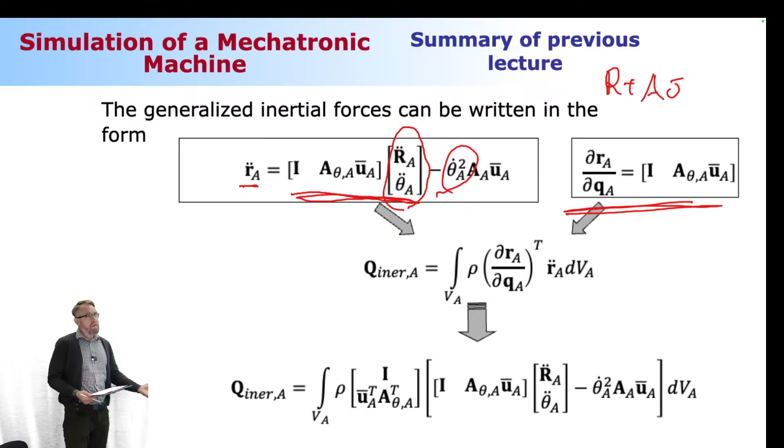Is this the only way to make it happen? No, like I said, there are many other ways, but this is fairly straightforward as it is based on global coordinates. This form, where we have these generalized coordinates like it is shown here, is called global coordinates, even though they are describing the body reference coordinate system with respect to the global coordinate system.

Alternatives that you might have seen in robotics are relative coordinates. That's a conceptually different story, because then we're looking at the body connected together via different kinds of joints. Like if there would hypothetically be another beam-like body connected via a revolute joint, you would look at the angle difference between these two bodies. This is what's called relative coordinates, typically used in robotics.

We are not going to discuss methods based on system topology, but are making use of this more straightforward global coordinates approach. But again, there are these other methods, and you can go back and forth between them. So if not happy with this selection of variables, you can make use of these relative coordinates. They are a generalized kind of mapping that you can convert one to the other, for your information level. I don't know if you guys care about this information, but now you know. At least you've been told.

So two components that come along: again, mass multiplied by acceleration, and the quadratic velocity vector. That's it.

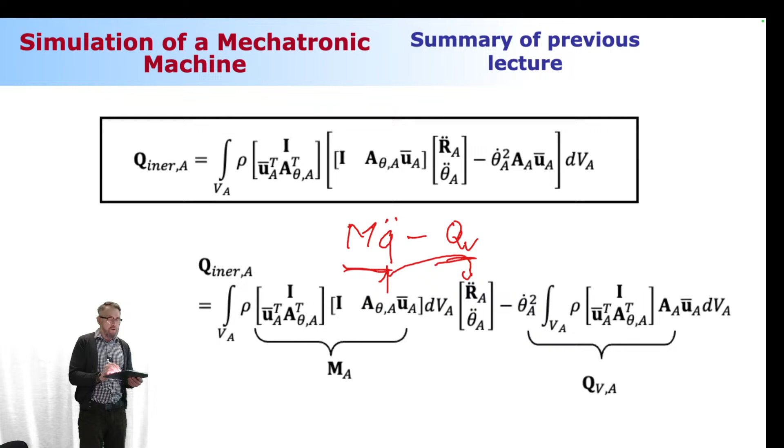Now, if you take a close look at these components, the mass matrix consists of three different parts. First, the submatrix located in the upper left corner is a diagonal matrix, where the diagonal components are the mass of the body. So this is a 2 by 2 diagonal matrix, off-diagonal components in the submatrix are zeros, and the diagonal components represent the mass of the body. This makes sense because the columns and rows associated with these components are translation in the x and y directions. Inertia has to be related to how heavy the mass is, so if you want translational acceleration, what matters is the mass of the body, nothing else.

Then the one located in the lower right corner is the mass moment of inertia, which is how much the inertia resists rotation. That depends on where you are rotating with respect to. If you're rotating with respect to a coordinate system in the middle of the bar, resistance is less than if the coordinate system is located at the end of the bar. Now keep this in mind: regardless of where you measure your inertia component, the mass matrix component for mass will always be the same. It's not possible that a human being will weigh differently depending on how you measure it. If you measure my body weight using my right leg or left leg, it's the same body weight, it doesn't change. Whereas the inertia will change because then we're looking at where the rotation is with respect to.

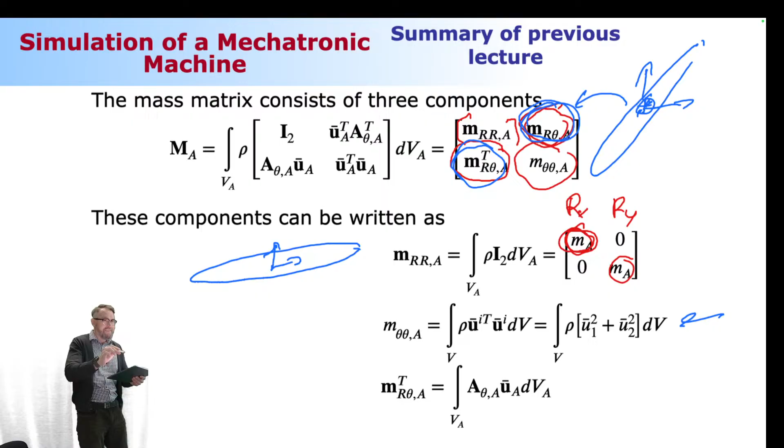Okay, when do you get the diagonal mass matrix? You get the diagonal mass matrix when the body reference coordinate system is located at the center of the mass. And your quadratic velocity vector becomes 0 for the same scenario - when the body reference coordinate system is located at the center of the mass.

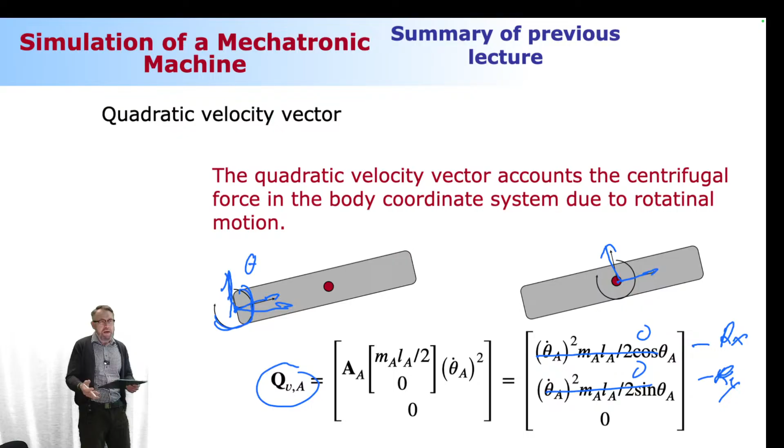Now we're in the first in-class quiz. The first in-class quiz is on. The mass matrix of a body is a diagonal matrix if: the body reference coordinate system is located at the center of the mass; the body reference coordinate system is located outside the center of mass but within the boundaries of the body; the body has a beam-like shape; or the body reference coordinate system is located outside the body. These are the 4 scenarios, and only one is correct.

Should we look at this one, or the next in-class quiz, since the next one is related? The quadratic velocity vector is 0 if - same scenarios but in a different order this time: the body has a beam-like shape; the body reference coordinate system is located at the center of mass; the body reference coordinate system is located outside the center of mass but within the boundaries of the body; or the body reference coordinate system is located outside the body. These are the same 4 options as the previous quiz, just in a different order.

So let me put myself back here. This is what I asked in the beginning. Now, I accept nothing but a 100% success rate. Okay, are we good? Let me see if there's any... All right.

So we're going to take all the bodies in our system into account, because in a multi-body system, as the title implies, it consists of multiple bodies. So what we need to do for each of these bodies is take the virtual work done by each body into account. This is a concept that is different than, for example, in a finite element procedure, because we're going to keep on adding the coordinates. We're going to be adding the work done by each of the bodies simply by keep on adding the number of unknowns, which is conceptually different from many other computational procedures.

So this is what you're going to get. You're going to have here generalized inertia forces minus generalized external applied forces. That's the kind of like this way. Remember what we discussed in the very beginning.

The same story, but the difference is this. This is expressed using global coordinates. This is the same, but using generalized coordinates. And what we're really after here is, of course, this one.

We still have a problem here, because in this equation we are not taking constraints, these motion limitations, into account. So that needs to be accounted for one way or another, and of course we have multiple ways to take that into account.

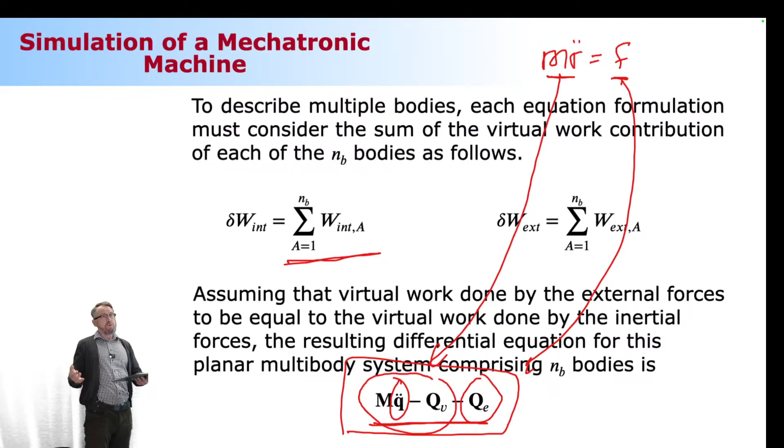But anyways, let me first explain how you can construct the system mass matrix, the system quadratic velocity vector, and the system vector of external applied forces. Like I said, you do that by keep on adding the coordinates.

So this system mass matrix is called a block diagonal mass matrix, but it's not sharing degrees of freedom. Why is this? Simply because if we have a vector of generalized coordinates, it consists of unknowns related to the first body, unknowns related to the second body, and so on and so forth. So we keep on adding the length of the unknowns based on the number of bodies in a system.

Okay guys, how many bodies, how many coordinates does each of the bodies need? Three. So, team 400 Euros car, you guys need to look at me too. So you need 3 coordinates, and it's going to be 3 generalized coordinates per each body, okay? If you have 2 bodies, how many coordinates do you need? 6, and so on and so forth.

The same holds here. So now if you have, let's say, a total of 3 bodies, what's going to be the size of your mass matrix? 3 by 3, it's going to be 9 by 9. Because we keep on adding, this submatrix is going to be 3 by 3, this submatrix is going to be 3 by 3, this is going to be 3 by 3. And if we have a total of 3 bodies, then the final dimension is going to be 9 by 9.

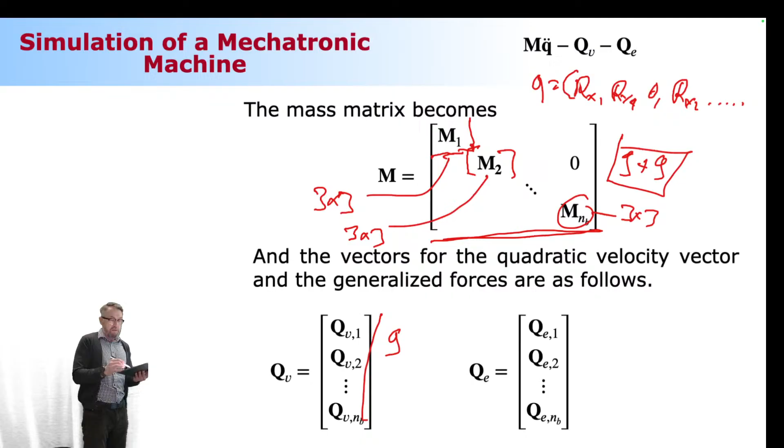Okay? The same, if we have here 3 bodies, what's going to be the length of the quadratic velocity vector? 9 units. And if it is external applied forces, it's going to be 9 units.

And then we have the vector of constraints, which is kind of separated. So we have the equation of motion, and then we have constraints. Something needs to be done. We are not happy the way things are because they are not accounted for yet. They are separately accounted, but we need to put them in the same package where the equation of motion and constraints are simultaneously accounted for. All right? And that's what we're going to look at.

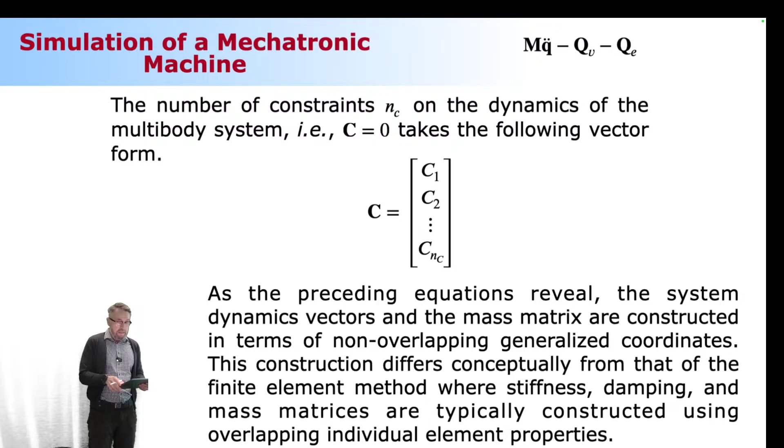Now here's the whole story when you're using this very sophisticated way of virtual work. So you have virtual work of the entire system: inertial forces, external applied forces. This is eventually how things will be written.

Now here comes something you have not heard before, because the concept of virtual work is very often misused, and it's misused exactly in the way that it is explained here. So you're saying that this equation is going to be equal to 0 regardless of what? Regardless of the scenario. And this equation can be set equal to 0 in a certain scenario only.

In a certain scenario where the virtual displacement, this one here, has to be kinematically admissible. A kinematically admissible virtual displacement would be something like, if you have a box connected to ground via a translational joint, a kinematically admissible displacement would be moving it back and forth in a way that doesn't violate the constraint.

But that's not the same as this one, because this one is saying virtual displacement of all the generalized coordinates. If I do it as mentioned here, I would also introduce a virtual displacement like this. That's not kinematically possible because the constraints are not allowing me to do so. Or I can introduce the rotation of the box like this. Same story, that's not kinematically admissible.

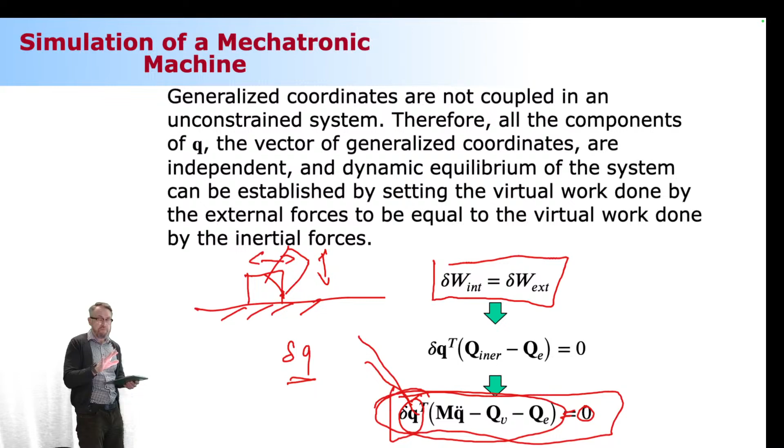So if I continue the story, this equation, generally speaking, is not equal to 0. Why not? Because the virtual displacement is introduced to all the generalized coordinates, and we are not accounting for the constraints. So this is a big problem.

So we have to express this in a way that it is kinematically possible, which is a little involving. So this is a task we can make it happen, but we are not going to do this today. So we can use something a little different than that, and that's kind of what we're aiming here.

Let me try to summarize this because you guys need to listen to me right now. So this is what came out from the concept of virtual work. And generally speaking, we cannot set this to be equal to 0 because we introduced the virtual displacement to all the possible motion scenarios, which is typically not possible.

So if I have here a crankshaft mechanism, let's say I'm going to take a look at the connection rod like here. The connection rod can move in a certain way because of the constraints. I cannot just say that it moves any way it wants, regardless of the constraints, because I would violate the constraints. Now this is what I'm going to take a look at next. So I'm going to express this in a way that takes constraints into account.

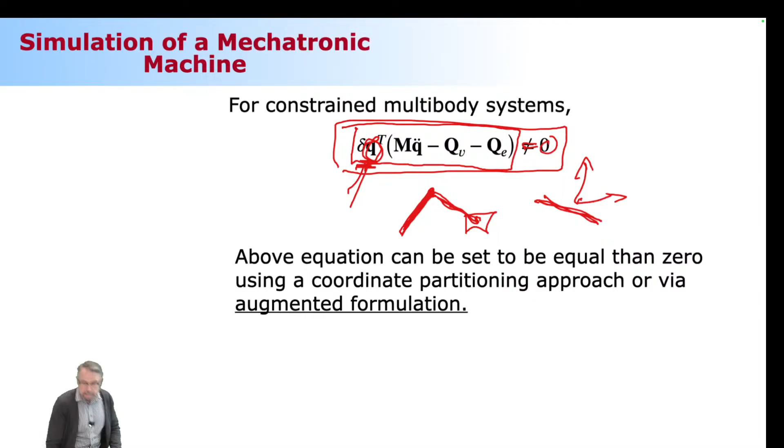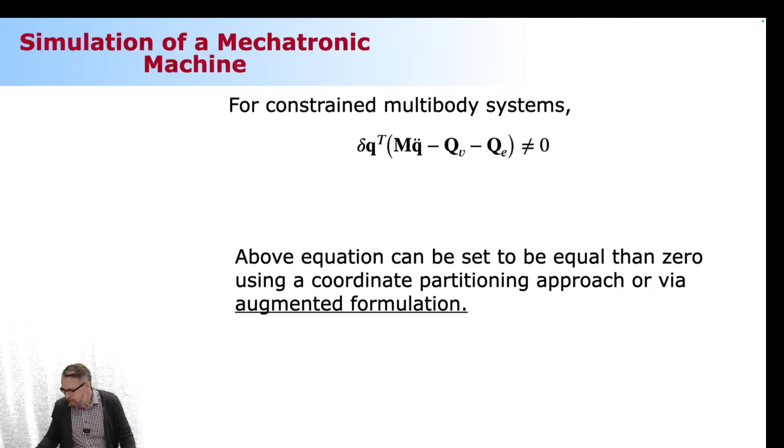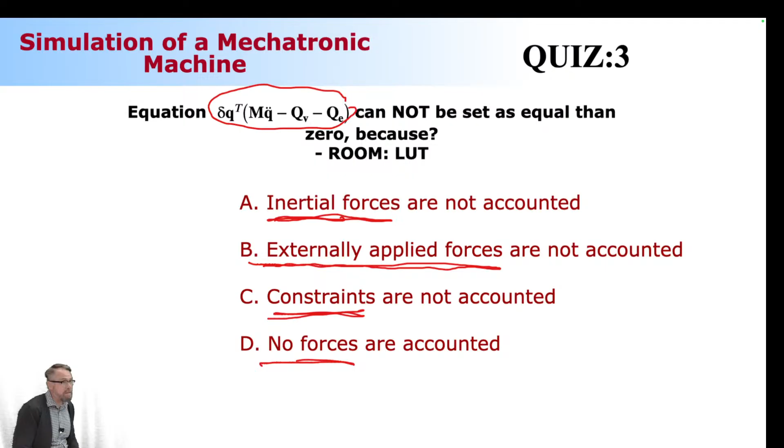Okay, so let me take myself back here. My next question is this: the equation we just looked at cannot be set equal to 0 because something is missing, something we have not accounted for. Now take a look at this equation and see if we are taking inertial forces into account. Are we taking inertial forces into account in this equation? Are we going to take the external applied forces into account? Are those accounted for? And are we going to take constraints into account? And are we going to take no forces into account? No forces are accounted for. So these are the four options.

Okay, the question is not on. So let me put it on. This one, okay.

And then what follows is that we're going to make a break from mechanics. Good news, so we are not going to look at mechanics for the next slides, but instead we're going to take a look at the subject matter that we like the most: mathematics. How do you guys feel about that? Yeah, I can tell for online participants that people are smiling a lot. They're very happy here in the lecture room. Some of them are crying because of the happiness, that finally they can leave mechanics behind and focus on mathematics only.

Okay, but this one, what is correct? What's the correct answer? D. C. Yes, constant. Constraints. Seriously, guys?

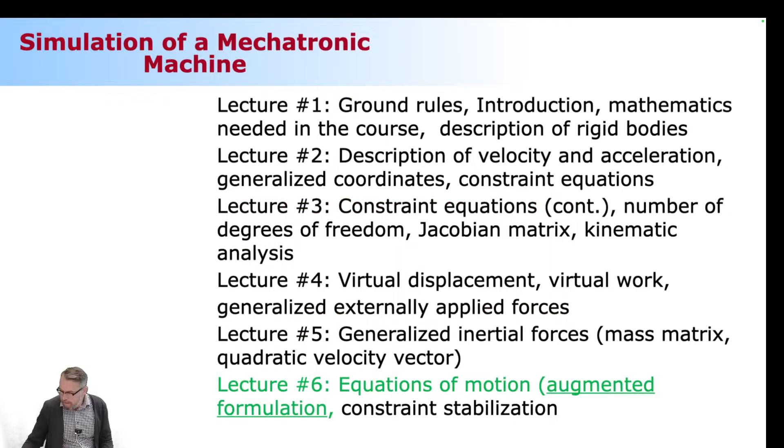Okay, all right. So we got last time it was like 91 answers? So we can wait another minute, and then we're gonna go. And then let me just show you what follows is mathematics.

So I want you to revisit your mathematical notes. You remember when you were in elementary school, they mentioned that there's this optimization problem where you need to minimize the function such that the constraints are accounted for. This is exactly what we're doing here, same story. And if you take a look at your notes from elementary school, you'll soon remember there were two options: you can substitute the constraint inside of the original function and then differentiate the original function, and this is one way to find the minimum. Or you can add these constraints to the original function with help of Lagrange multipliers.

All remember this story? Or was it so many years back that you don't remember this so well anymore?

Okay, so we're going to take a look at that momentarily, but before that, we got all the answers in. I don't think it's 100%, maybe 80, I'm thinking it's as low as 70. Okay, so it's 80, just switch down to 84. It was 85, somebody was just entering the incorrect answer.

But constraints are not accounted for, so we have to take constraints into account. The problem is that we introduce in the virtual displacement all the coordinates, not considering constraints at all.

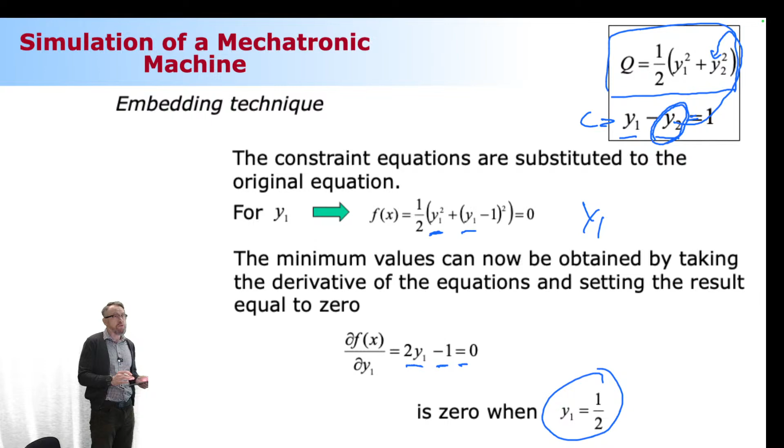Then you redo the whole story, but this time solving for the second component, which is y2. Here you take this to the other side of the equation and substitute the result here. This is how it reads. And then you differentiate it.

Now the only variable you deal with is y2, and you differentiate that with respect to y2. This is what you're going to get: 1 plus 2 multiplied by y2 equal to 0. The extreme again can be found when you set this equal to 0, like shown here, and solve for y2, which is minus 1 divided by 2.

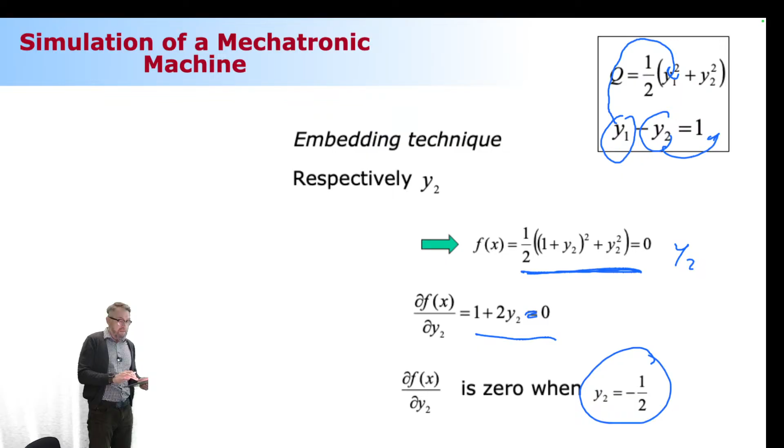Nothing new here, this is what you learned already in your childhood. Nothing special, but you might have forgotten there's this alternative: instead of substituting the constraint inside your original function, you make use of the Lagrange multipliers.

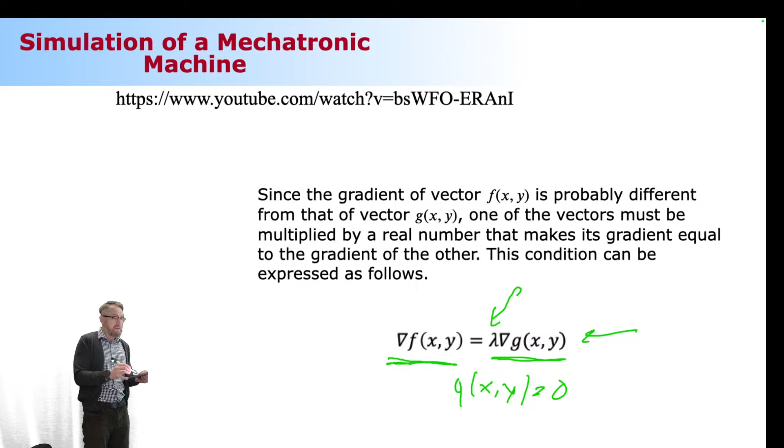The math is this: this is a delta of the original function, this is a delta of the constraint equations, and then this is the one that makes them equal in length. This is where the minimum is located at. And then we have to take one more thing into account, which is that we have to include this constraint because we have to stay within the trail. This is what we need to minimize next. This is where these two gradients are parallel, and this is where you stay within the trail, mathematically expressed.

Okay, now the same problem we looked at a little while ago: this is my original function, this is my constraint equation. How can I make use of the same story, but in this mathematical scenario? We have to compute a delta of the original function, which I'm simply taking my original function here and differentiating that with respect to my variables. And what are the variables this time? This q vector consists of two components, that is y1 and y2. Okay, of course this is a scalar.

This is again scalar, this is a vector. So when you do this differentiation, you're going to get the vector, not the matrix, because this is scalar instead of vector. You're going to get these two components.

Simply differentiate this with respect to y1, you're going to get y1. Differentiate this with respect to y2, you're going to get y2.

Then I'm going to take my constraint equation and do the same. I'm going to compute this gradient of the constraint equations with respect to my variables. You're going to get 1 and minus 1.

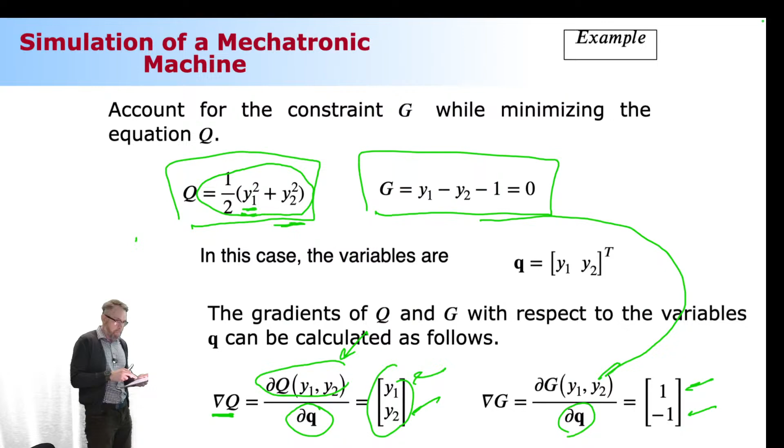What is that in the mechanics? Well, if you have the pendulum like this, because of the revolute shown here, this price we have to pay because of the constraints are reaction forces due to the constraints.

Reaction forces due to the constraints. Okay. Very lengthy story, very painful story.

And now you guys are thinking, okay, it's going to be very difficult when we make use of this thing. That's the opposite, it's an opposite. It makes things easier because adding a constraint is something like...

Let me tell a story. Like the multi-body community, there have always been two strong communities: one that is American community and one that is a European community. And they have a disagreement about what is the best way to go. There's no such thing like the best way to go, but the American community always goes according to these Lagrange multipliers because it keeps things simple, but it's just adding the number of unknowns. Things are very simple, whereas the European community is always favored for substitution.

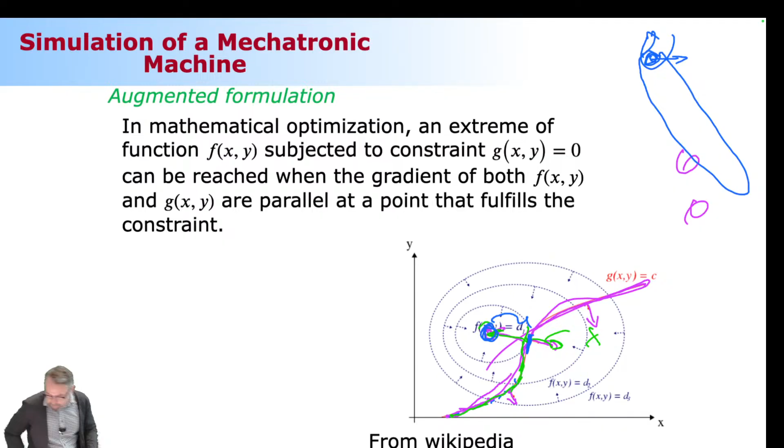Okay, so my proposal is this: we're going to make use of what we just learned in the case of multi-body system dynamics. So this was the whole concept of Lagrange multipliers. That's what we're going to do.

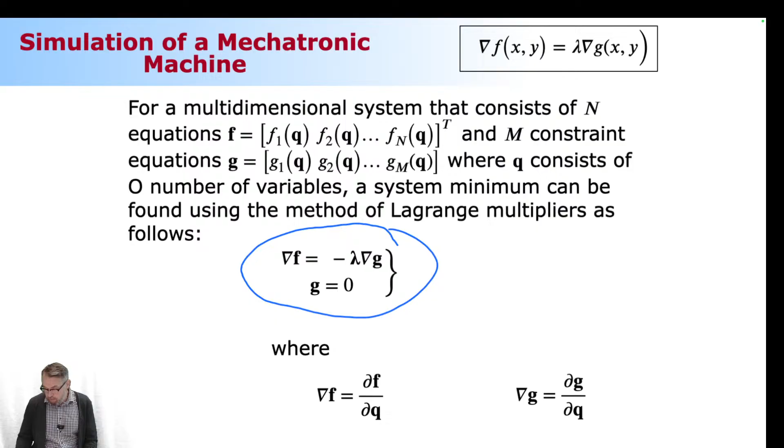And when you take a look at these components, what are they? They're actually something that we are already familiar with. So we have here, this is the original function, which is inertia forces minus external applied forces. We knew this already. And what is this?

This one here, when you differentiate your constraints with respect to your variables, is something that we are already familiar with. This is the Jacobian matrix. Because the Jacobian matrix, remember, was this. This is the constraint equation. This is the unknowns.

When you add them together, now this is how it reads, and that's it. Now we kind of have an equation of motion because we have constraints taken into account with help of Lagrange multipliers. So we add the constraints to the original equation, and that's how we're going to find the extreme location.

Okay, now you guys, if you still find your way away from the lecture room, how many minutes do you need? How many hours do you need to recover from this? One hour, one hour. Yeah, today I don't know if you noticed that I mentioned we have this question and answer session getting started at 6 o'clock. But today I need to leave early from my office, so I need to leave at 6:45. So it's only going to be 45 minutes today, because I have family business to take care of.

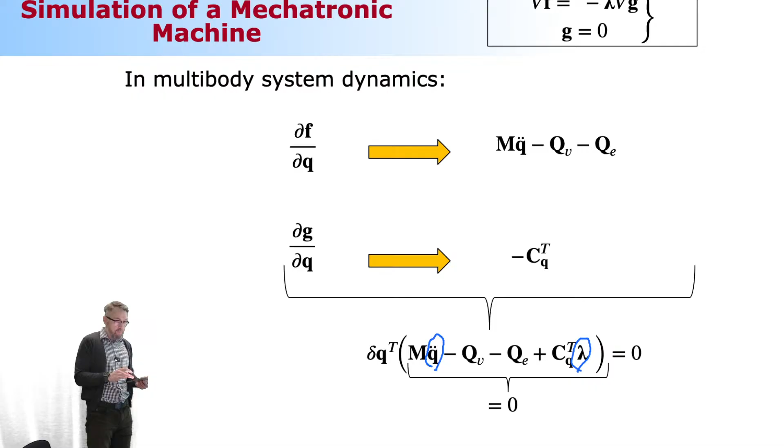So we need to make use of what we just discussed earlier, the constraint equations. Now we have a matching number of equations and unknowns. Here we have unknowns, which are the acceleration of generalized coordinates and Lagrange multipliers. Once we take constraints into account, then they match. Why do they match? Because the number of Lagrange multipliers is always going to be the same as the number of constraint equations. The number of reaction forces will always be the same as the number of constraint equations.

This is it. So this is going to be something that is called a set of differential algebraic equations. The problem is that if you look at the time integration schemes that are available out there, most of them are not made for this kind of system. There are some that are good for differential algebraic equations, or systems of differential algebraic equations, but most time integration schemes are used to deal with ordinary differential equations. And this is not that form.

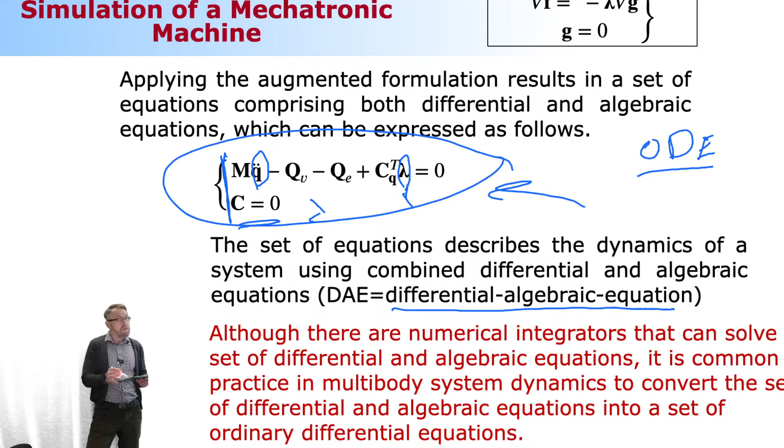So what we can do then is convert this equation to be in a form of ordinary differential equations. That's going to happen by making use of the constraint equations. We're going to differentiate them twice with respect to time. We're going to be able to introduce a new vector, which is called QC. It has no physical interpretation, no clear physical meaning, but it helps us convert differential algebraic equations to ordinary differential equations. Now, if I introduce this very last component, I'm able to convert this equation to be expressed like this.

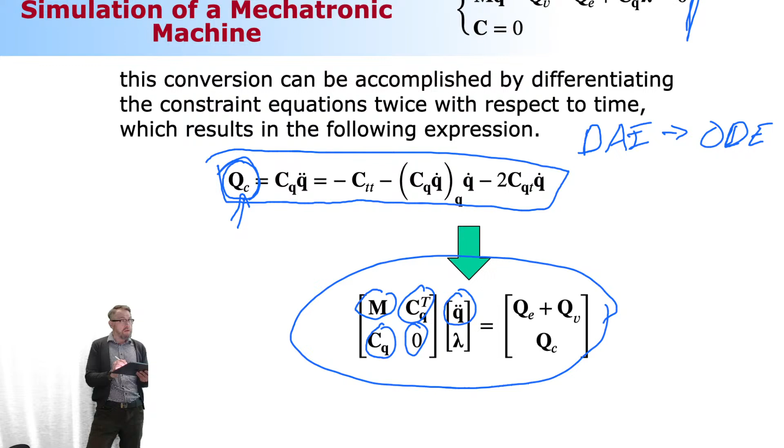And this is the equation of motion. Remember, this is a mass matrix, this is a Jacobian matrix, Jacobian matrix transposed, this is a zero matrix, this is acceleration of generalized coordinates, this is Lagrange multipliers, external applied forces, quadratic velocity vector, and the QC to make this conversion.

What is going to be the vector of unknowns? It is this one. The vector of unknowns is no longer just the generalized coordinates, but generalized coordinates plus constraint equations expressed by Lagrange multipliers. Okay, so now if I have a system like this—sorry, that's a little bit of an unclear drawing—but it's a pendulum, one moving body. How many generalized coordinates?

3, because every body needs 3. How many constraints? 2. So it's going to be 3, 2. What's going to be the number of unknowns? 5. Because this is unknown, like expressed here, and this is unknown, like expressed here. Not the constraint, let me correct myself. Constraint is not unknown, but how much it's going to introduce the reaction forces, that is unknown. That is expressed by Lagrange multipliers, this guy. So the number of unknowns is total of 5.

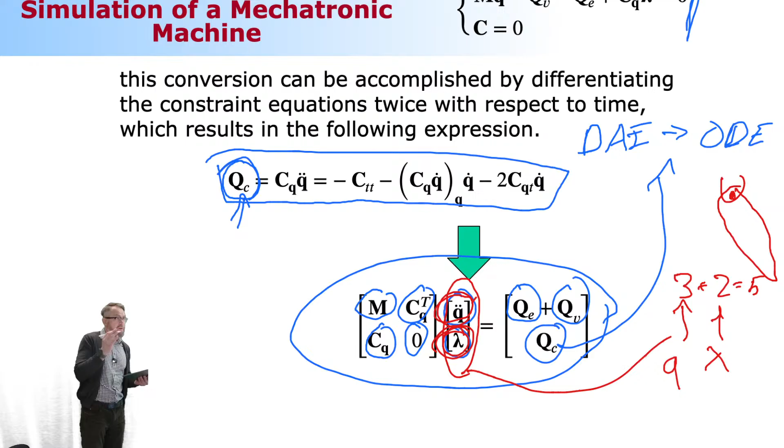Good. Now this is a whole story in short. This is where we're introducing the Lagrange multipliers. We're going to take the constraints into account. Once we differentiate the constraint twice with respect to time, we're able to do the conversion from differential algebraic equations to ordinary differential equations. That's the end of the story. So we reached the final conclusion of the class. Only thing left is we need to train this a couple times, and that's it. Then you're fully educated in what comes in computational dynamics. Not fully educated, but let's say you know at least one method, you know all the components, you know the concept behind it.

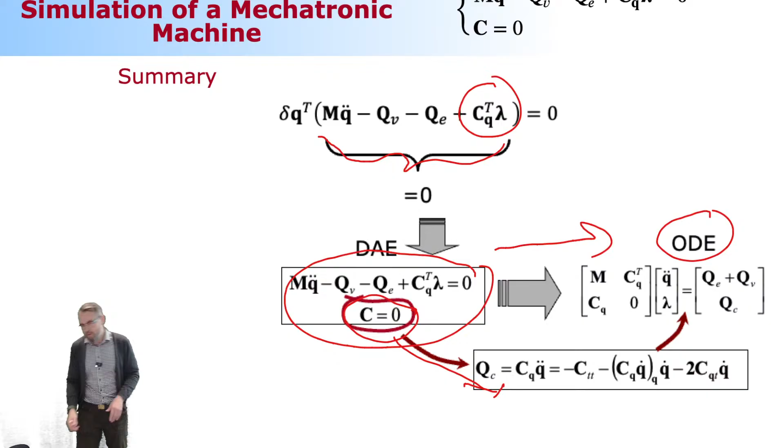Let me tell you this. What's the course that is the most hated course in the history of the universities? Dynamics. People hate it big time because it's so complicated, no one figures out how dynamics works. So once we're done with this story, you guys are not just experts of dynamics, but computational dynamics also. So it's okay to walk like a couple days like Michael Jackson did, moonwalking style, celebrating this big accomplishment, because it's a big deal. And then you need to start working like others. But this is a big deal. Big deal. Okay.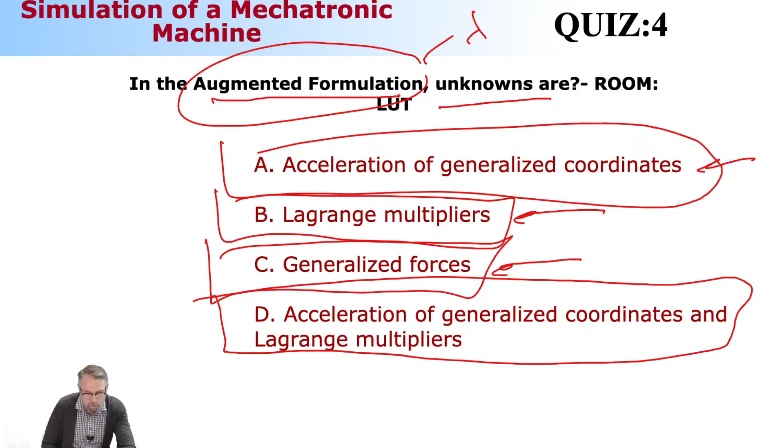In augmented formulation, unknowns are: acceleration of generalized coordinates, and augmented formulation is the one based on Lagrange multipliers. Acceleration of generalized coordinates and Lagrange multipliers, generalized forces, or acceleration of generalized coordinates and Lagrange multipliers. Which one is the correct answer? These are the 4 choices. Let me take this to the in-class quiz, and then we're going to take a couple more in-class quizzes and simply practice what we just learned. Okay, in augmented formulation, that's a method based on Lagrange multipliers. What are the unknowns?

Pretty easy, I would say. Okay, so would you like to see this more, or can I go? Because what I would like to do next is this: I would like to practice what we just learned. And I'm going to solve, first what I'm going to solve is the dynamic response of this complicated mechanism. So it's almost like a pendulum, but it's more complicated than that.

So it's a system that consists of one moving body that is constrained in a primitive joint here. So this can go up and down, and this can go left and right. So this is going to be my mechanism. This is applied by gravity, so the gravity force only. Nothing but the gravity.

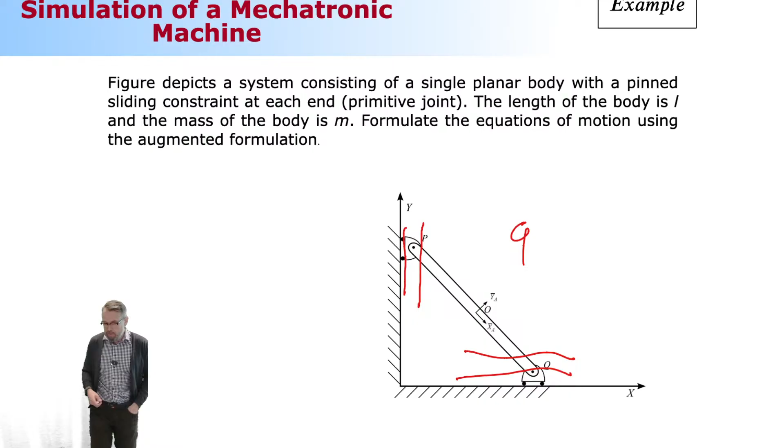So how this works - what we're going to do is follow certain steps, and more or less automatically, once we've completed those steps, we have an equation of motion. Now here comes something extremely important to understand: no thinking, just following the steps, and it's going to be fine. It's going to be automatically correct. And as soon as you start thinking about shortcuts and clever ways to go, you're going to make a mistake. So what we learn: no thinking, very systematically go from one step to another, and then you end up with an equation of motion.

Okay, first step. First step is, in this example, the number of unknowns is what? Okay, let me first take this off. I'm going to take a look at the in-class quiz.

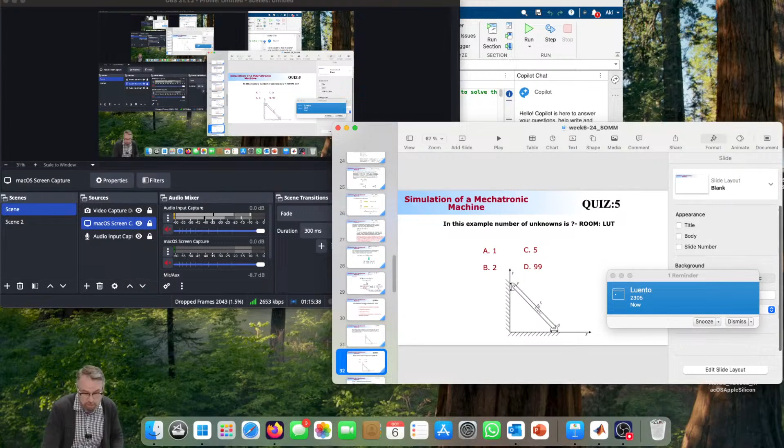This is 100, that's absolutely right, so this is a 100% success rate. But you guys are still thinking, so while thinking, let me show how to solve the response.

Okay, these are the steps. Number 1, mass matrix. Highly recommended that you do not think too much, just take the pre-calculated tables and that's it.

First, I need to take a look at the 2 by 2 matrix that is located in the upper left corner. So it's going to be a diagonal matrix where the mass of the body is located in the diagonal components.

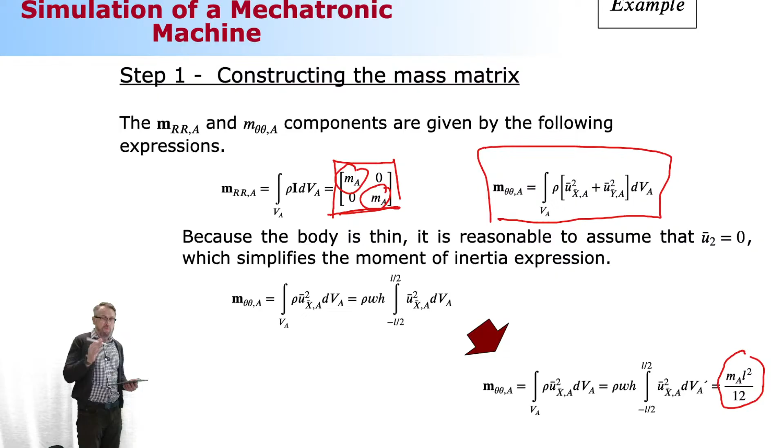Then I need to compute the mass moment of inertia. I don't recommend you compute it in this hard way, but just take a pre-calculated table and that's it. When you do so, you're going to get the mass multiplied by length squared divided by 12, because this is the lowest mass moment of inertia you can get for a body like that, since the body reference coordinate system is located at the center of mass.​

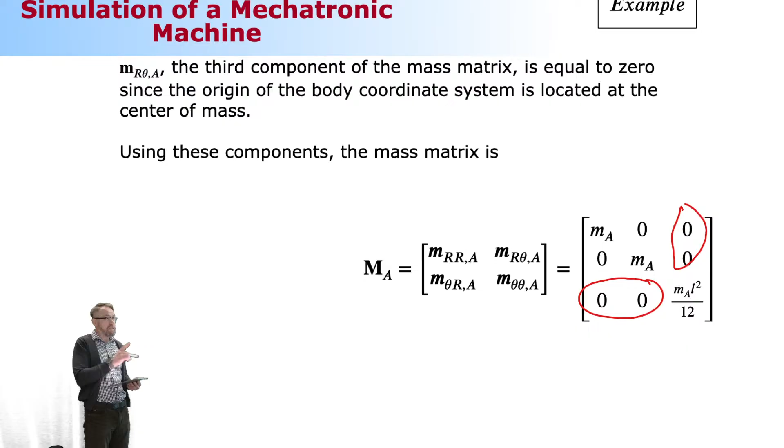Okay, then the off-diagonal component is going to be 0 because the body reference coordinate system is located at the center of mass. This is my mass matrix.

Step: construct the Jacobian. What are the components in the Jacobian? I need to get the constraints, and I need to differentiate my constraints with respect to my generalized coordinates, which are here.

Okay, constraints are located here and here. So what should I do for that? I simply go to each of these locations with the help of the equation, the only one that I know, this one.

So first I'm going to go here, then orient myself according to the body reference coordinate system, and then make my last leg with the help of vector u bar.

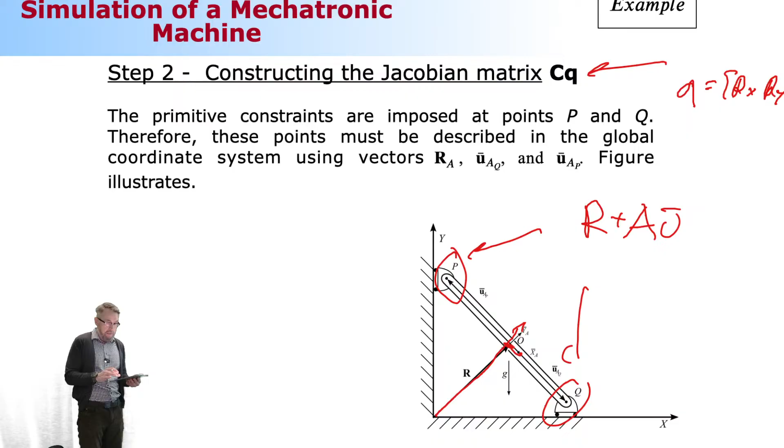So let's take a look at point P, the one that is here. I'm going to first travel to the origin of the body reference coordinate system, taking orientation into account, and the last thing is the vector u bar.

Look at how the body reference coordinate system is pointed. This is x, pointing downwards. This is y, pointing in the transverse direction. So how much I have to travel to reach this location is going to be x minus L divided by 2.

y is 0. When I substitute that information here, setting this, the motion in the global x direction is constrained — this is not possible, meaning this one here has to be 0. So when I do this math, it gives me this constraint equation.

Make sense? Second one, located — maybe I need to take some of the drawings away. Okay, so the next point is this one. Same story: I'm going to first travel to the origin of the body reference coordinate system.

Then I take the body orientation into account, and then make my last leg with the help of the vector u bar. Vector u bar obviously is L divided by 2, because x is pointing downwards, and then the y transverse direction is 0.

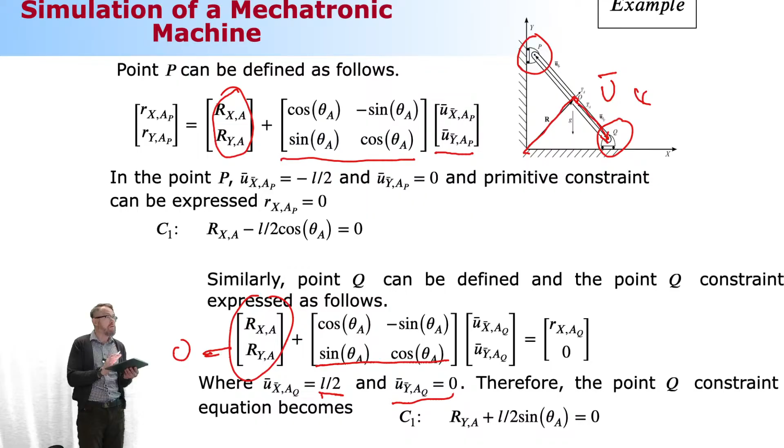That's going to keep, and again, now the motion in the y direction is going to be 0, so that gives me my second constraint equation. That needs to be differentiated with respect to my variables, and here's my Jacobian. Done.

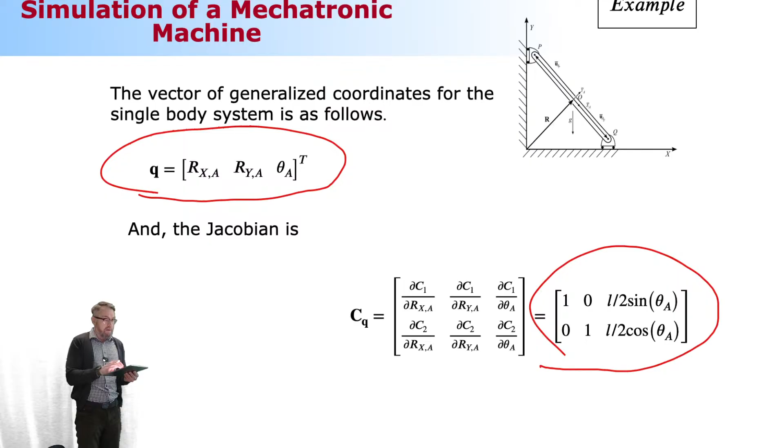Step number 3: generalized external applied forces. I say only one force is applying to the system, the gravity force, pointing downwards. So that's the only force in the system.

So what I need to do is identify where the force is applying. It's here — vector u bar here is 0. When I differentiate that location with respect to my variables, it gives me the magic mapping matrix, which is not very magical this time.

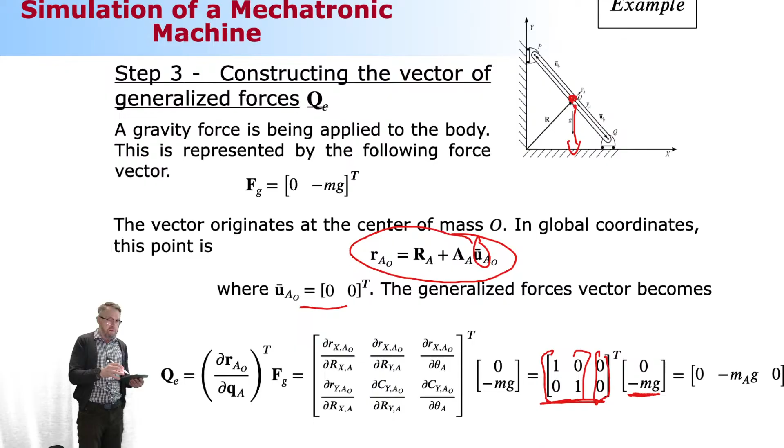It's the identity matrix, and then the 0 matrix, 0 vector. Let me correct myself. And then that's multiplied by the gravity force, which has a component in the y direction only, and it's going to be mass multiplied by the gravity constant with a minus sign, because it's pointing downwards. This is my generalized external applied forces.

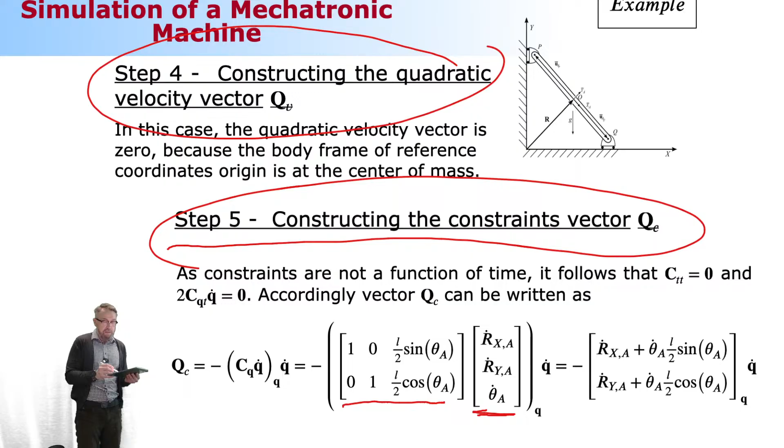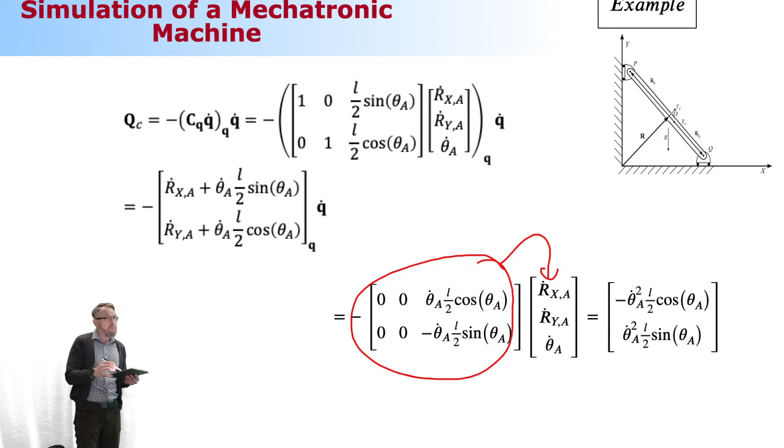Quadratic velocity vector is 0, so I don't need to care about that. The one thing left is this vector QC, where I have to differentiate my constraints this complicated way we learn when we compute the kinematics. So here's the Jacobian multiplied by velocity, which gives me the vector differentiated with respect to my generalized coordinates. This is what I'm going to get as a result. Then that is finally multiplied with velocities, giving me the vector of two components.

Last thing to do is assembling. So this is my already inverted, semi-inverted mass matrix. Jacobian with the transpose, this is my external applied forces, and this is my QC vector. I'm good to go. I can solve here my velocity first, and then position, and that's it.

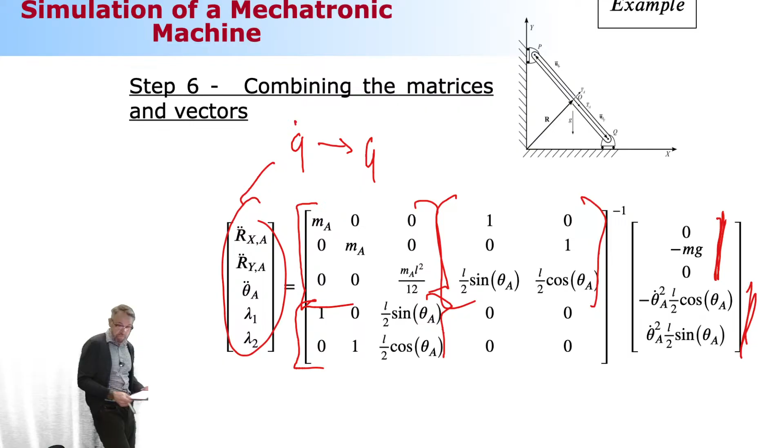Would you like to see it? Okay. Ready.

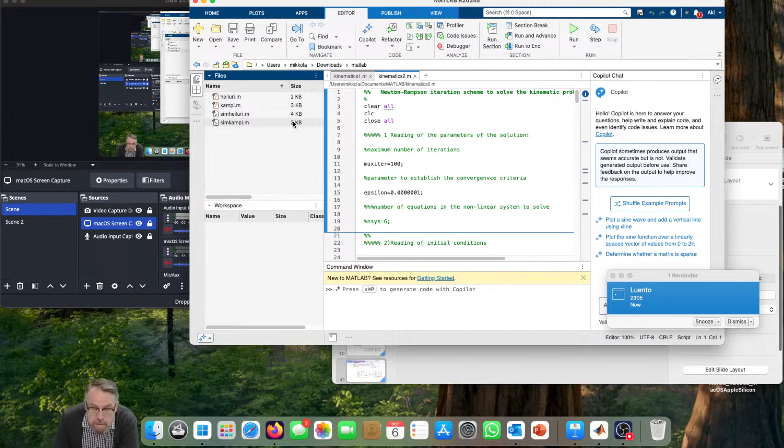So let's see if we can visualize. This is a visualization. Let me make this small enough so it's not blocking the view. We're like here. Okay, ready?

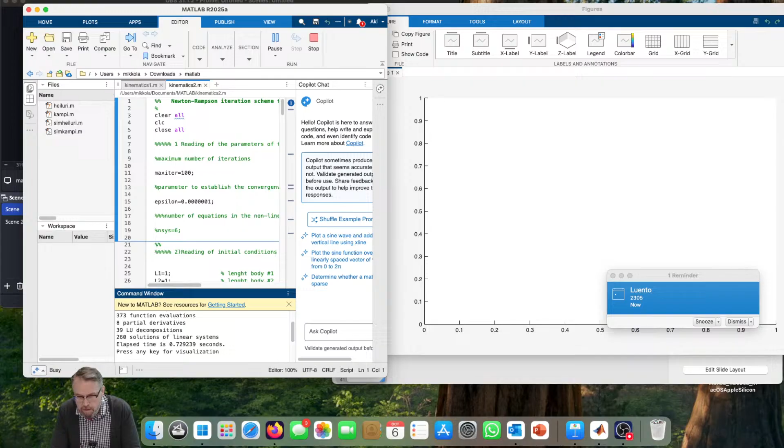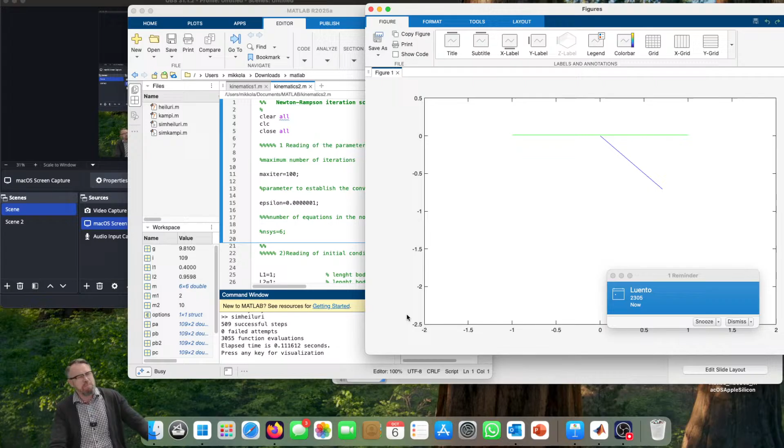This was incorrect, so I don't want to use this one. So let me see. Okay. Not good, because this is not what we wanted to solve. I'm experiencing technical difficulties - actually, I'm not experiencing technical difficulties, but I did not make a preparation good enough, because this is now the pendulum.

I don't want to solve that, but I want to solve the system that is slightly different than we just looked at. We can correct the file, or we can just take a look at another example, and I can solve the correct response next week.

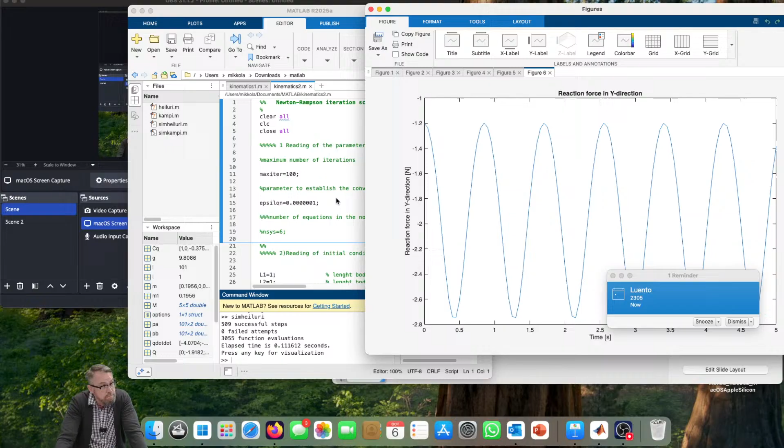Which one do you want to go? Next week, because you are rushing yourself back home, I guess. Okay, good thing, so you're going to see the MATLAB solver a week from now.

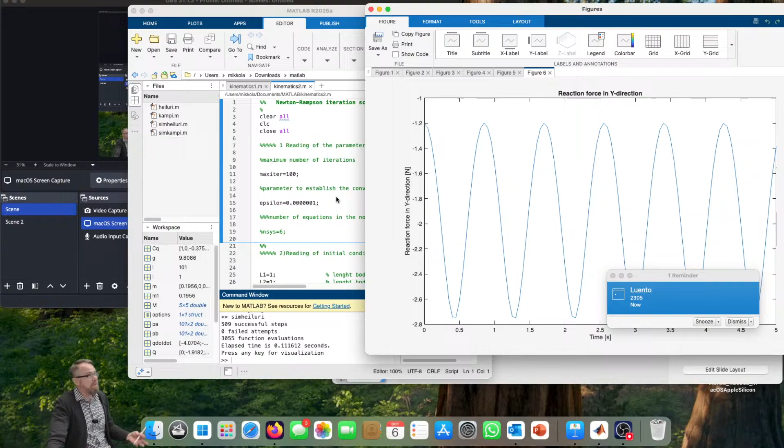And this is going to be something that is so straightforward that any mechanism in your life from this on, you can solve it, if it is a planar case. Three-dimensional case is a little bit more complicated than that, but just a little bit more complicated. Okay, that's it.

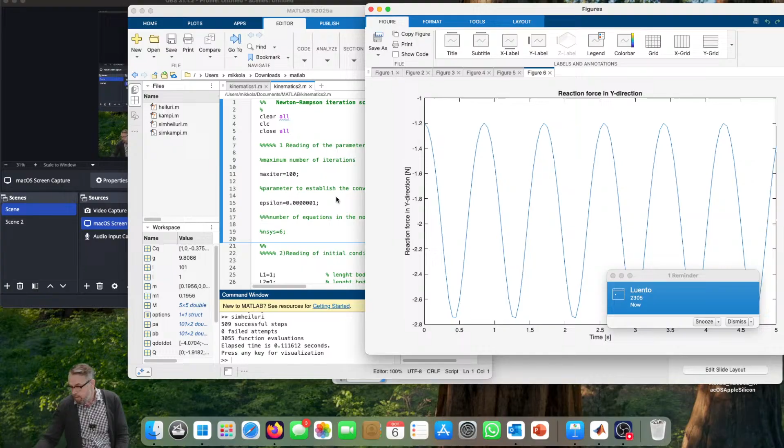My next mechanism is this. It consists of two moving bodies, one revolute joint here, another revolute joint here, and one prismatic joint here. How many generalized coordinates?

6. How many constraints? How many constraints? 6.

Guys happy? 5, you're saying 5? Okay, 5 is an alternative. Any other options? 3.

Okay, so it's a little bit unclear writing. Okay, Team Asia is changing that from 6 to 5. Okay, you sure about that? Team Finland is saying 5. Correct answer is 5. How many unknowns?

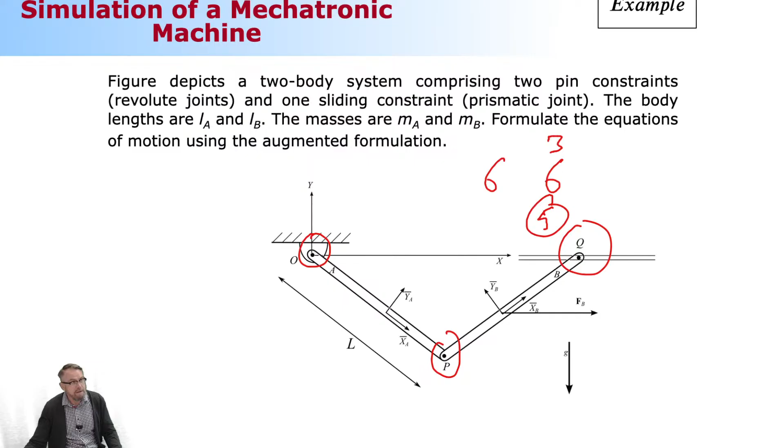11. Okay. All right, so let me take myself here. Okay, what was the success rate here?

I think it was pretty high, so because the correct answer was 5.

Okay, 1 has a 1 degree of freedom, or wasn't what I was asking. 2 was a planar case - makes no sense. 99 got 1 vote. I think we have somebody that is logging in the system and intentionally answering everything incorrectly.

But keep this in your mind. You can play as much as you want, but it is affecting your final grading. So I don't know if you're going to laugh so much if you know that, because it's not so much fun.

Okay, this one. Okay, you want to see the mechanism again? No, it's okay. This is how it looks.

Now I have two forces. I have one point force applying here, and the gravity that is applying to both of the bodies.

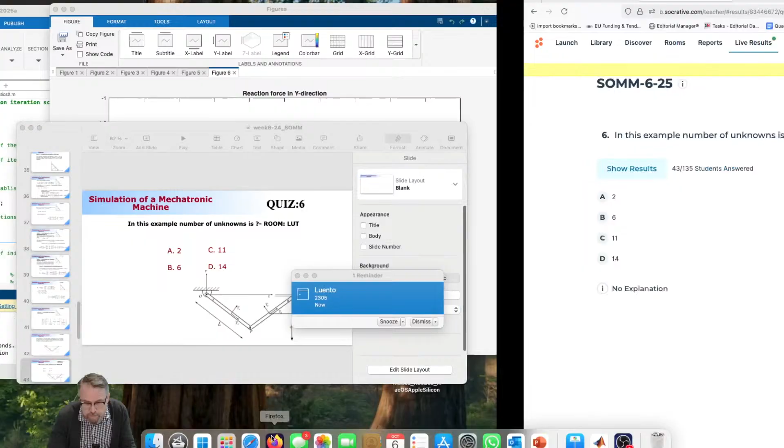Okay, so the number of unknowns in this case is how much? Okay, let me take a look at this one. Oh, you guys are not yet ready?

Okay, while you guys are thinking, let me show how you can create the equation of motion. What's the difference between this example and the previous one? No difference, you're going to follow the same steps over and over again. What you get automatically is your equation of motion. Again, we start from the mass matrix, that's number 1, Jacobian matrix, number 2, so on and so forth. No exceptions, always the same procedure over and over again.

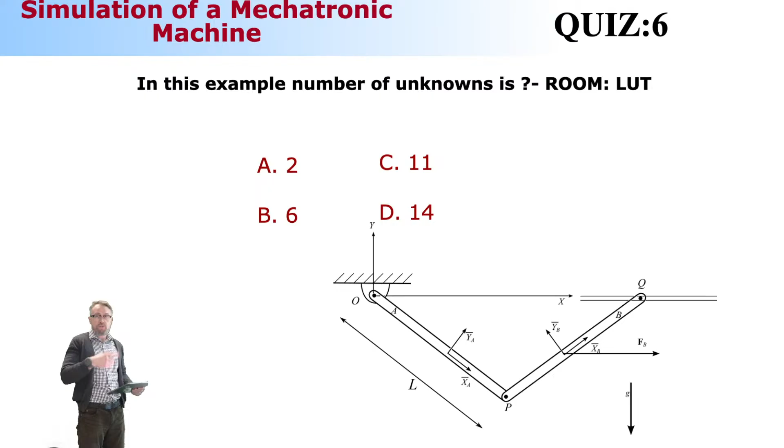Okay, first the mass matrix. This time I'm cutting corners a little bit, so I'm just telling you how the mass matrix looks. This one is a beam-like body, and the body reference coordinate system is located at the center of mass. Same here, beam-like body, it's here. So it's going to be diagonal matrices that I get, diagonal matrices for this one and this one.

And now I went too far off. Here, this is how they look. And I just need to assemble them as a block diagonal assembly. So here's the first body, here's the second body. They do not overlap.

Those of you in finite element formulation know that if you have two neighboring elements, they share the same degrees of freedom, and that's where the stiffness matrices overlap. So the system stiffness matrix would be one stiffness matrix here, another one here, and they overlap at this particular location. We don't do that in multi-body system dynamics. We don't do the overlapping.

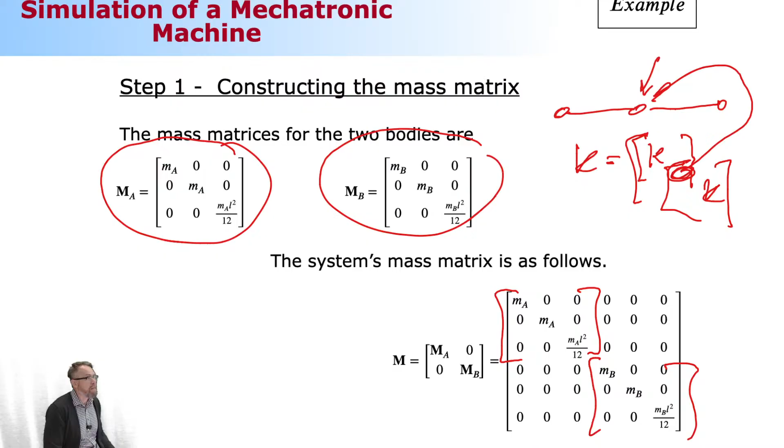A question: why is it divided by 12 at the corner? Because of the shape, it's the center of inertia. The question again: why is it divided by 12? Because this is a mass moment of inertia. Remember when we compute the mass moment of inertia for a beam-like body, this was mass times length squared divided by 12.

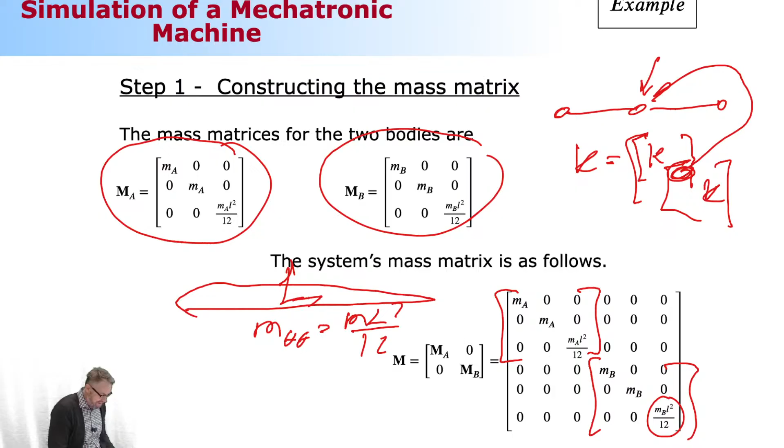Constraints, Jacobian matrix. What we do is compare the constraints. This time I'm cutting corners, so I'll simply set the constraint for this one here. I'm going to set these to be equal to zero because it's a revolute joint, and the revolute joint is located at the origin of the global coordinate system. Then I'll take a look at this revolute joint located here. Let me change the color. I'm going to travel here like this, and set these two notations equal. That gives me two additional constraints.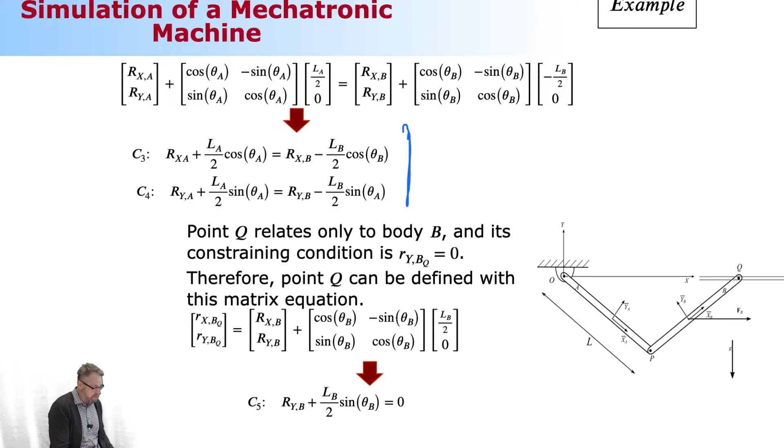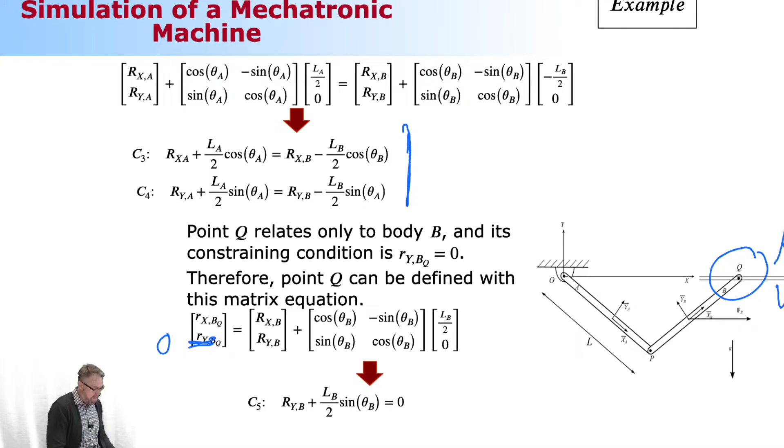Constraints 3 and 4. Then there's a primitive joint where the motion in the global y direction is constrained, meaning this one here is constrained. This is my fifth constraint equation. Now the Jacobian looks like this. These are my constraint equations, which I'm differentiating with respect to my variables, Rx1 corresponding to the first body, and the same for the second body. This is how the Jacobian reads.

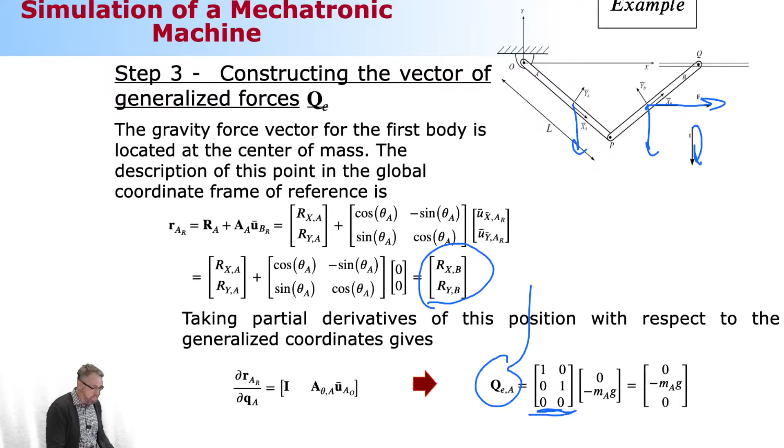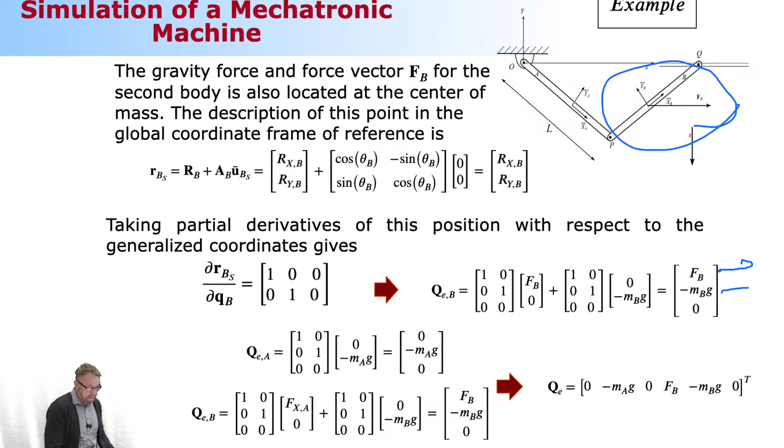Then my next one is the generalized forces, the externally applied forces. I have here the pin force and the gravity force. Gravity is applied here and here, located such that they're always at the origin of the body reference coordinate system. So when I compute the coordinates, it's like this, and the mapping matrix becomes very simple. This is related to the first body, a vector of 3 components. The same for the second body, but this time it's the x component and y component, as shown here. When I put these vectors together, this is how it reads.

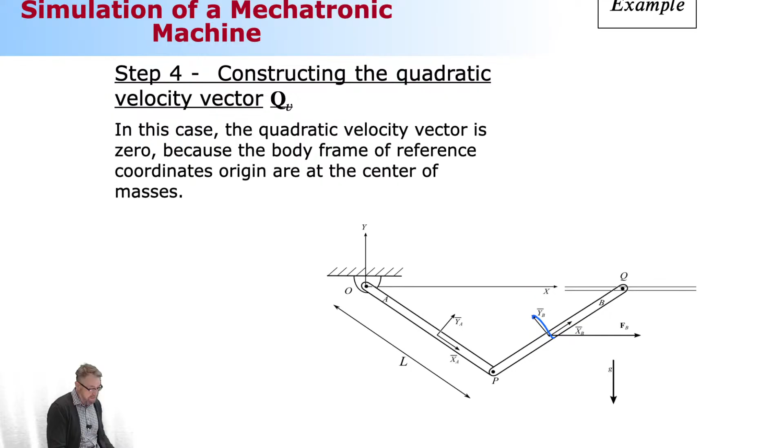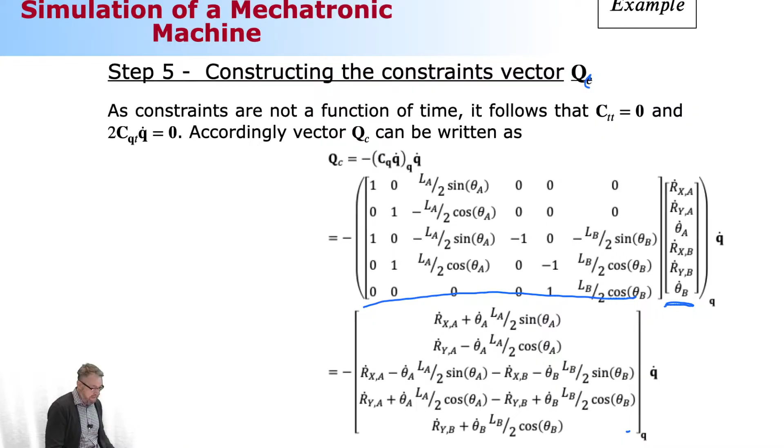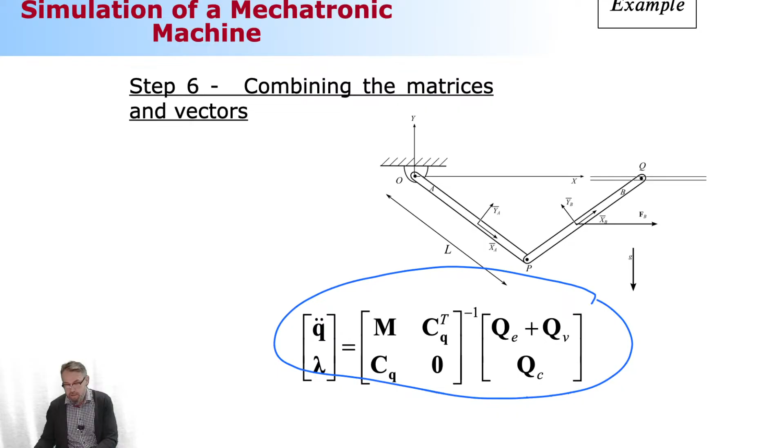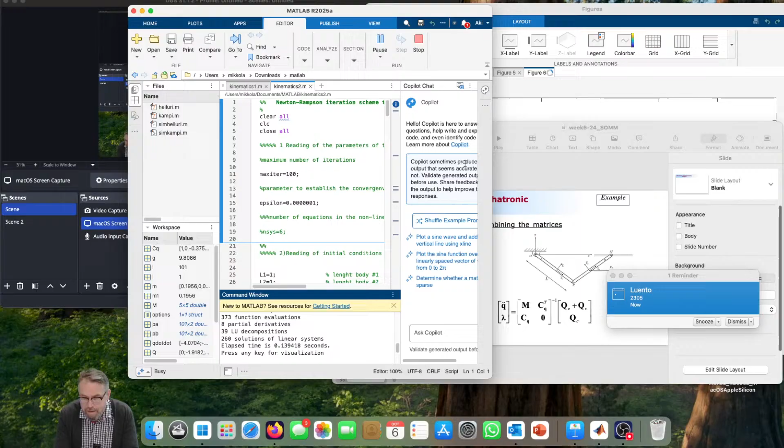Then the quadratic velocity vector, I don't need to worry about that given how the body reference coordinate system is located. And then comes my QC vector. I take my Jacobian, multiply it with the velocity, giving me a vector of 5 components, differentiated with respect to my generalized coordinates to give me the matrix, then multiplied by velocity. My final assembly gets so big I'm unable to write it all out, but that's it. The response is something we looked at a little while back, hidden here. Oh, here. Like this. Okay, let me make it more clear.

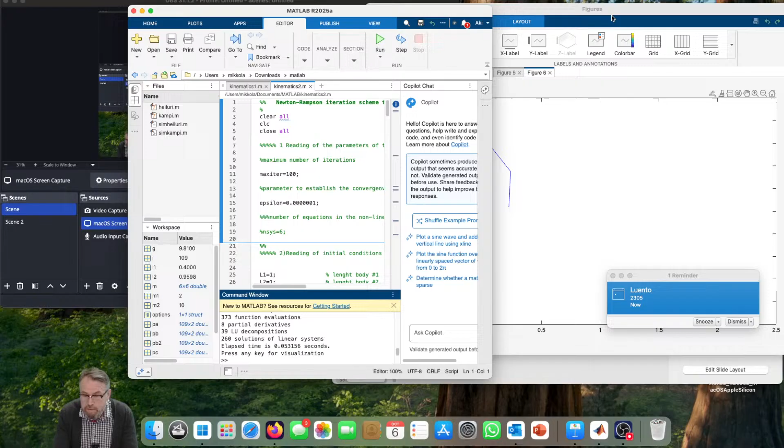Like this. Fantastic, absolutely fantastic. You like it? Well, you don't like that. So what's the big problem? It goes to, okay, because my computer is so fast, let me run it one more time. So it's going to be like this.

Nice. You like it? So you guys don't like this. Is something off? You need to tell me, is there something, is it a big problem, or just need to remind you this.

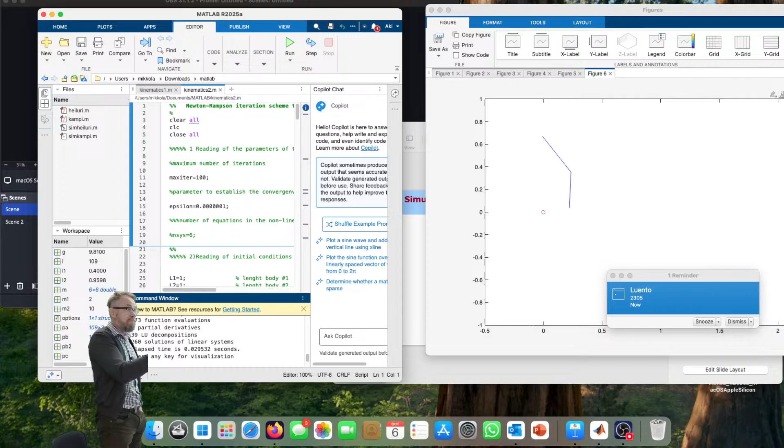This is a computer simulation, so it must be correct. Is this how it behaves in real life? This is a mechanism you see in your car. Is this the way that the crank and the connecting rod is behaving? No. Why not? You're right, it's not the way it behaves in reality.

We have a big problem, because look at this. This point here is supposed to be here. So this system is broken. It is broken. Okay, this comes with 2 major lessons to you.

Computer simulation could be correct, not necessarily. This is a good example when it is not correct. This is not correct because what we do here is that we are making a pretty serious integration error. And the error comes from the fact that the constraints are taken into account at the acceleration level only. Because remember how I introduced the constraints, my equation was the constraints differentiated twice with respect to time, meaning acceleration level.

When I come down from acceleration to velocity, I always introduce some amount of integration errors. When I come down from velocity to position, I'm going to make another set of integration errors. And this is what can happen. So the errors can accumulate. And when it accumulates, then the constraints are no longer fulfilled. There are tricks to avoid it.

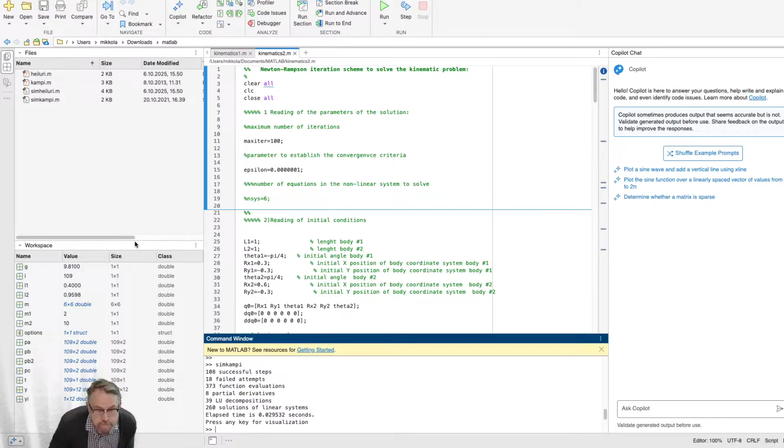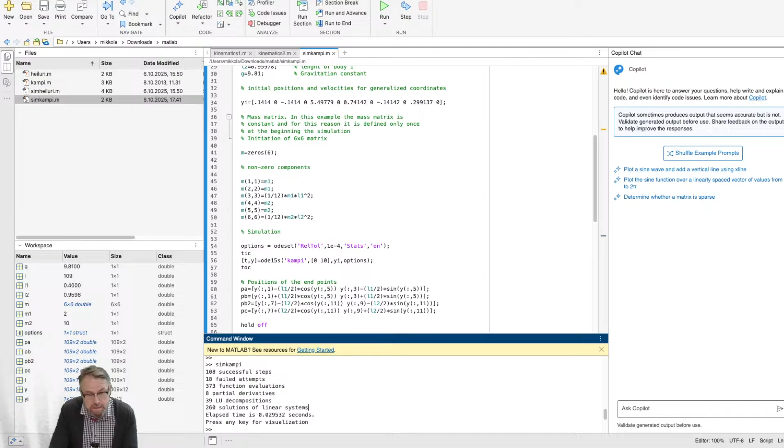But this time what I'm going to do -- oh, this is such small font that I might not be able to see this so well, but let's see. This is my file. I'm going to correct my settings such that it's going to be a little bit tighter tolerance. The tolerance is very, very small at the moment, so I'm going to make it better. I mean, it was a very big tolerance, so I'm going to make it smaller. Let's see if I can make a better simulation here. Okay? Better.

So was it you that said you're not happy with the response? Okay, you're going to get stomach aches because that's worth another cup of coffee. So you others need to come and help, because your friend is drinking all the coffee here, and he's soon going to need medical attention because of that.

Too much coffee. Okay, 2 big lessons. You have to be very skeptical about whatever comes out of the computers. Another thing you need to be very, very skeptical of is your professor. If your professor says, look at it, this is how the mechanism has to perform, you need to be able to say, I don't think so. It's not easy, not easy at all. And I know it's the hardest thing to do, but it's your responsibility -- not just in this class, but other classes as well. You need to be the one giving these doubts: I'm not sure, is this really the case? I don't know, is it really how it behaves?

Now, we will get back to this problem. We'll just look at it a week from now. But right now we need to go because we're going to have this question and answering session getting started in 16 minutes. So you guys go back home if you can.